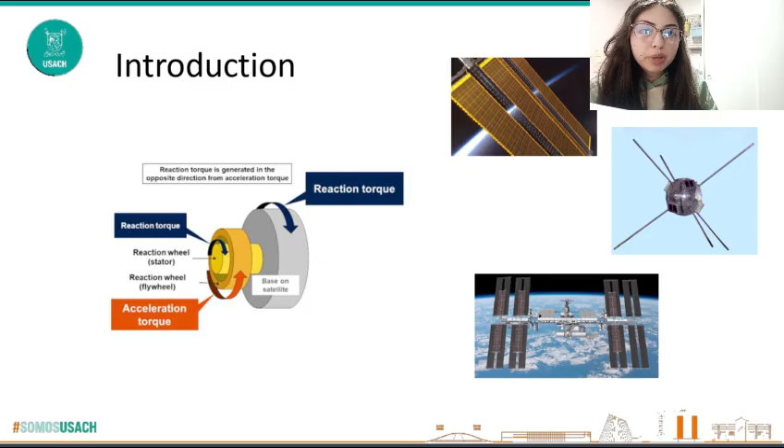In this presentation, we are going to focus on the prediction of trajectory of aircraft, the design and importance of reaction wheels, and the dynamics in the improvements of solar panel arms.

Hello, let me introduce myself. My name is Francisca Jara. I will explain trajectory prediction and its respective analysis.

Machine learning is relevant to rocket vehicles during space launches as it provides online trajectory planning using models that translate system control, ensuring the safety of the spacecraft, and avoiding failures that can occur in complex environments.

One of the methodologies used is neural networks, which dynamically adjusts spacecraft trajectory and orbital parameters in real time. This enables instantaneous data processing and, therefore, accurate results when autonomously executing orbital trajectory maneuvers. Figure 5 represents a deep neural network.

To better understand the dynamics of space engineering and rocketry, the launch of a projectile to intercept an asteroid is proposed, analyzing the moment at which both bodies will collide.

As shown in Figure 6, a free body diagram is established, where point B refers to the asteroid moving at a constant velocity v0, with an inclination angle of 30 degrees, heading directly toward point A, which refers to the city, with horizontal and vertical distance of L and H respectively. A projectile is also shown at distance L from the city, following a parabolic trajectory to intercept the asteroid.

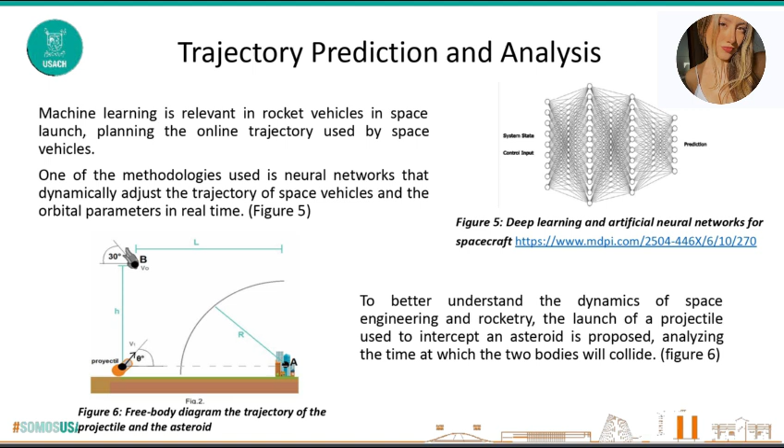First, we establish our reference frame r(t), where t represents time and r represents position. If we derive r(t), we have that velocity(t) equals r1, where r1 must represent velocity magnitude and direction, so |r1| equals v0. By observation of the free body diagram, we have r0 and r1. By substituting these two vectors in the parametric equation, we can describe the asteroid trajectory.

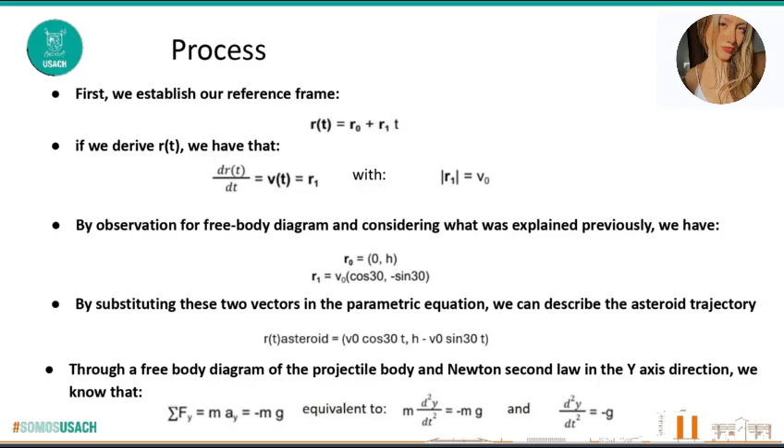Through a free body diagram of the projectile body and Newton's second law in the y-axis direction, we know that the sum of forces in y equals mass multiplied by acceleration. This expression can be solved by integrating twice, with constant 1 equal to v0 multiplied by sine theta. By applying initial conditions, the equation for y(t) results in minus 1/2 multiplied by gravity multiplied by t squared, plus velocity 1 multiplied by sine theta multiplied by t.

For the x-axis, we will do the same process of applying a free body diagram and Newton's second law. Taking the second derivative of x with respect to t and integrating, we obtain constant 1, where constant 1 corresponds with the initial horizontal speed. Constant 1 equals v1 multiplied by cosine theta multiplied by t.

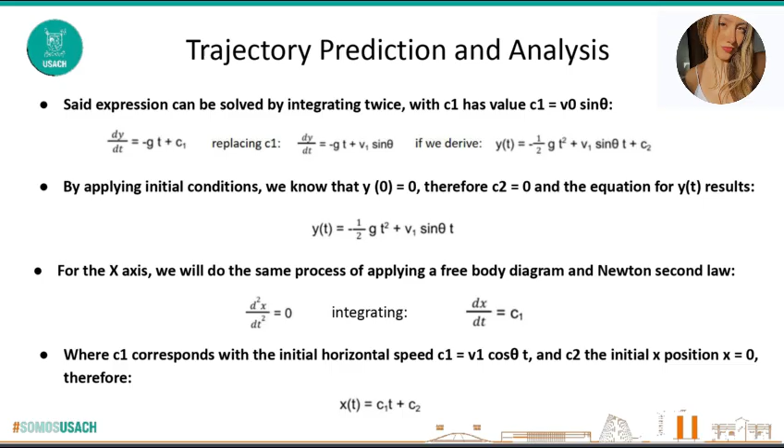And constant 2 is the initial x position, x equals 0, therefore x(t) equals constant 1 multiplied by t plus constant 2. If we parameterize the projectile trajectory, this results in r(t) projectile equals function x and function y.

Now, if we assume both objects collide at a time t, we can equate both trajectories, which results in position asteroid equals position projectile. We represent this vectorial equation as a 2-by-2 system, and the system of equations is solved by solving for t to obtain the time at which both bodies collide.

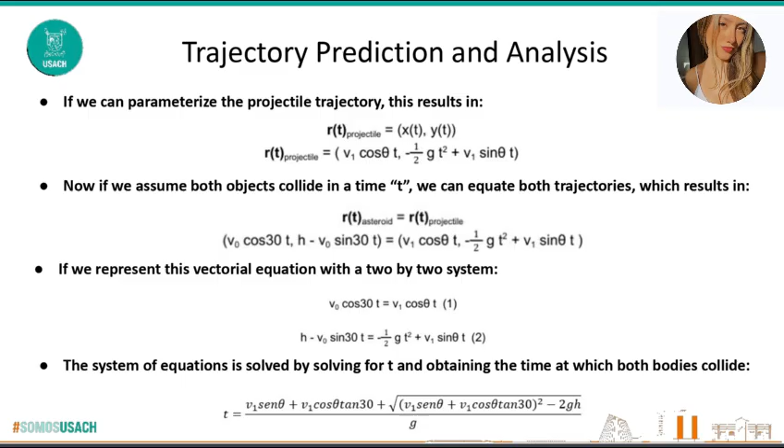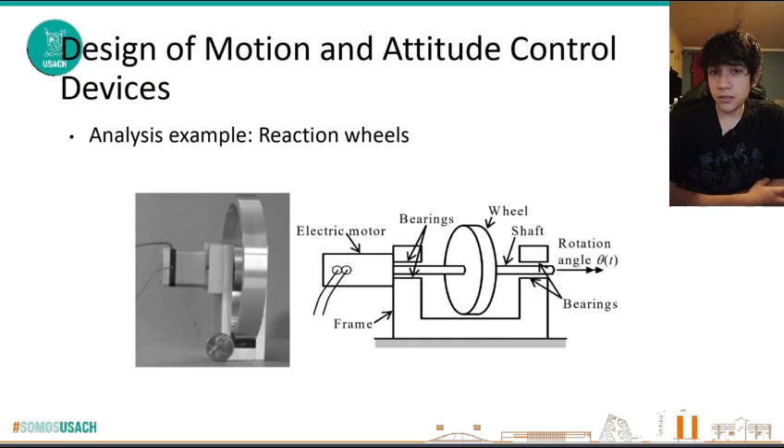Hi, I'm Oscar Merino, and next I'll be explaining how dynamics is utilized in the design of motion and attitude control devices. To do this, I'll exemplify by studying a reaction wheel. The first thing we do is draw a free body diagram of the body, and we show that the torques acting on it are a motor torque and a bearing drag torque.

We bring all of this to an equation by applying Newton's second law for rotational motion, in which the first term on the left, the sum of the moments, equals the motor torque as a function of time minus the bearing drag torque, which is proportional to the angular velocity by a constant c. All of this will equal the inertia of the body about its rotation axis times its angular acceleration theta double dot. We will reorder this equation by adding c times theta dot to both sides of the equation.

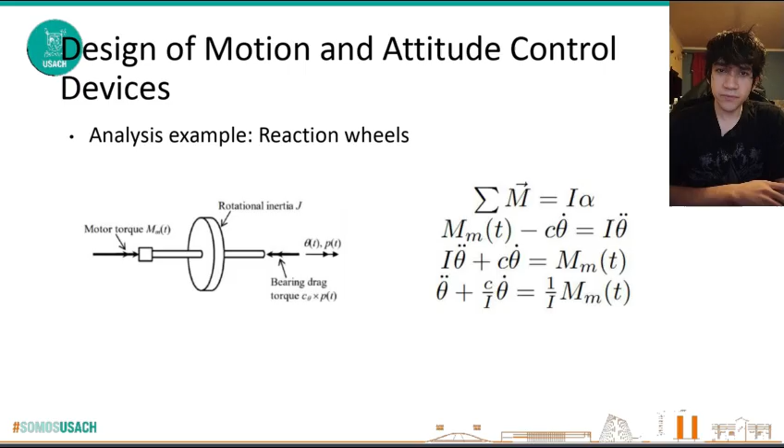So in this way, we can leave all of the time derivatives on the left side and the motor torque as a function of time on the right side. Then we will divide everything by the inertia, and thus we get the resulting differential equation theta double dot plus c over I times theta dot equaling 1 over I times the motor torque. So by solving this differential equation, we can get theta as a function of time, and thus we get a full description of the reaction wheel's rotational movement.

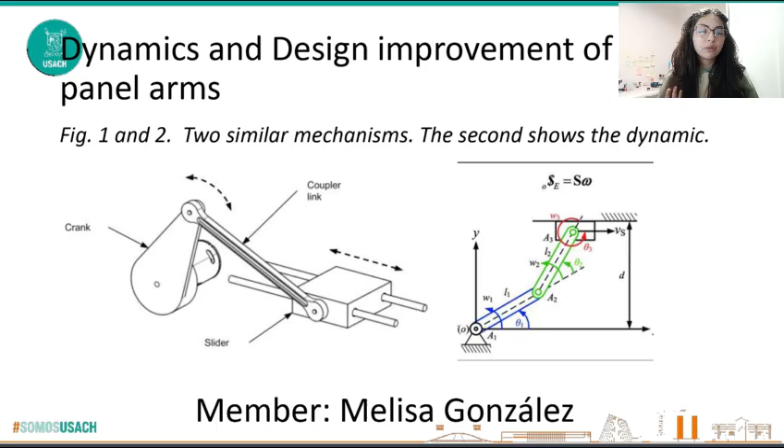Hello, my name is Melisa González, and I will talk about the dynamics and the design of improvements of solar panel arms. It is important to mention that the study of dynamics of mechanisms helps us to obtain certain properties that at the same time help us to understand the movement design and the operation of the system or the mechanism. This through formulas that show us the total mechanical energy, the kinetic energy, the potential energy, and within this we can have the velocities, the mass, the heights.

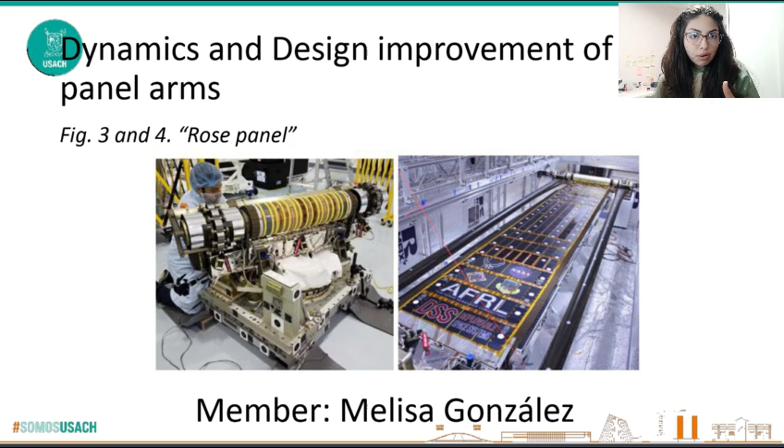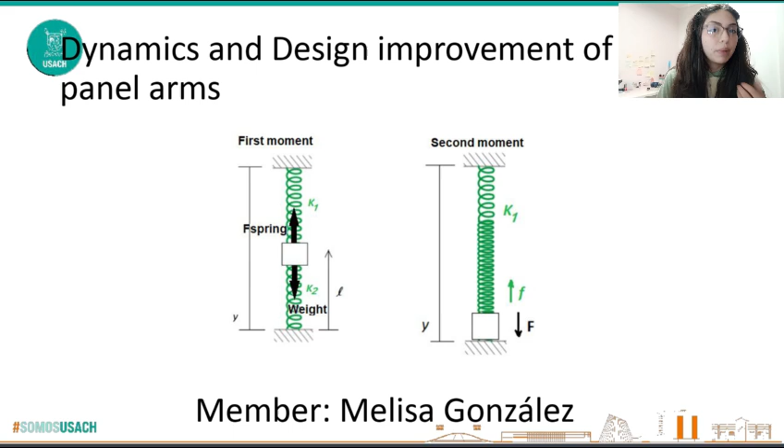We can see this in improvements of a solar panel arm, as an example. As we can see, it is a simplification of the problem where it has a constant weight, and at the same time this weight is between two springs with different constants k, and as we can see it has elastic potential energy, and in moment 1 it has no velocity, and in moment 2 it has velocity. If we read the formulas, we have potential energy sub 1 equal to the kinetic energy sub 2 plus elastic potential energy sub 2.

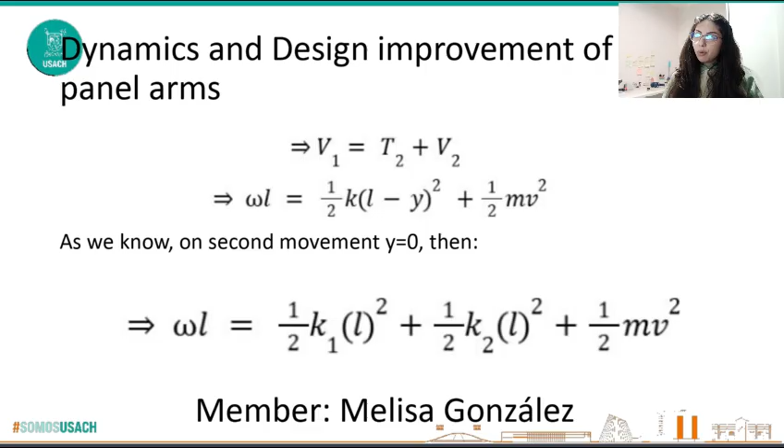Then this equation turns into weight multiplied by L equal to 1/2 of K times (L minus Y) squared plus 1/2 of mass multiplied by V squared. And then, since we know that in moment 2 Y is equal to 0, we have finally W multiplied by L equal to 1/2 of K sub 1 multiplied by L squared plus 1/2 of K sub 2 multiplied by L squared plus 1/2 of mass multiplied by V squared. That's the final equation.

Hello everyone, my name is Matthias. I'm going to continue developing the theme about solar panels. As my teammate Melisa explained, dynamic theory is very useful to get fundamental physics properties like total energy, total mechanical energy, potential energy, and kinetic energy. But also, it is very useful to get more engineering concepts like fuel consumption, power, and the moment made by an arm, a robotic arm, as I'm going to show in my example.

So imagine you have an arm that is going up and down, and you need a constant velocity in order not to damage the structure. And if we use a free body diagram, we can get M, the moment, equal to weight W for cosine of an angle gamma. Using this, we can obtain the work made by the moment U equal to weight W, open parentheses, sine of alpha minus sine of theta. So we have the addition of work made by the moment.